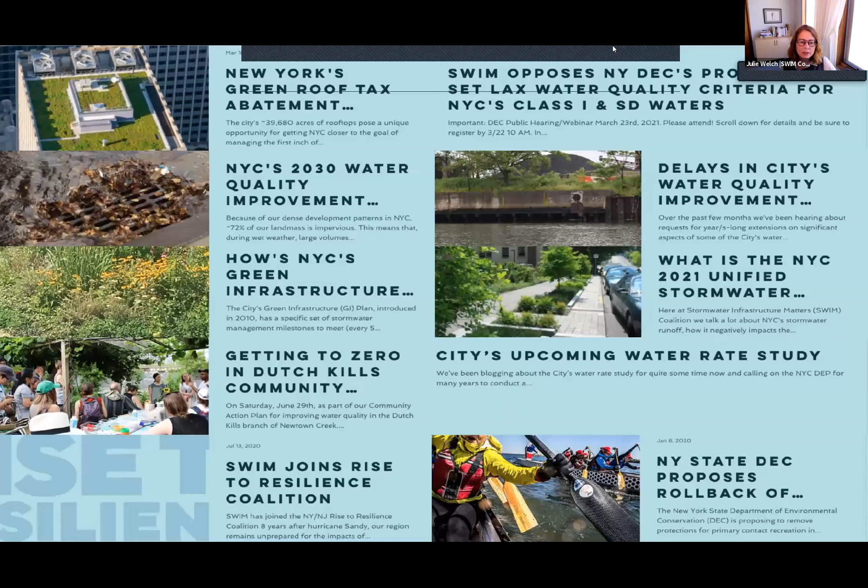Thank you also for hosting this meeting on your Zoom account. We do appreciate it. I also just want to take a minute and recognize all of the SWIM Coalition member organizations who over the past year have just truly astounded me with all of the work that you've been doing, the quick ways that you adapted to really challenging circumstances in our midst, and the work that you continue to do. It is an honor to be part of this organization and to interact with all of you. So thank you to the SWIM Coalition members whose work is truly amazing and does enormous good for the entire city of New York.

As Shino mentioned, we do want to have everyone please put your name, organization and pronouns in the chat box. We are recording this session and we'll post it on a YouTube channel to share it with folks who aren't able to attend today. And there is one person who I really must thank for an enormous amount of work over the past couple of years, and that's Anna Yee, a recent graduate student from the Pratt Institute, whose work has been sustaining us now for almost two years. She was a Pratt Fellow with us and then has stayed on to work with us throughout 2020 and then this year too. So thank you, Anna, for all of your work.

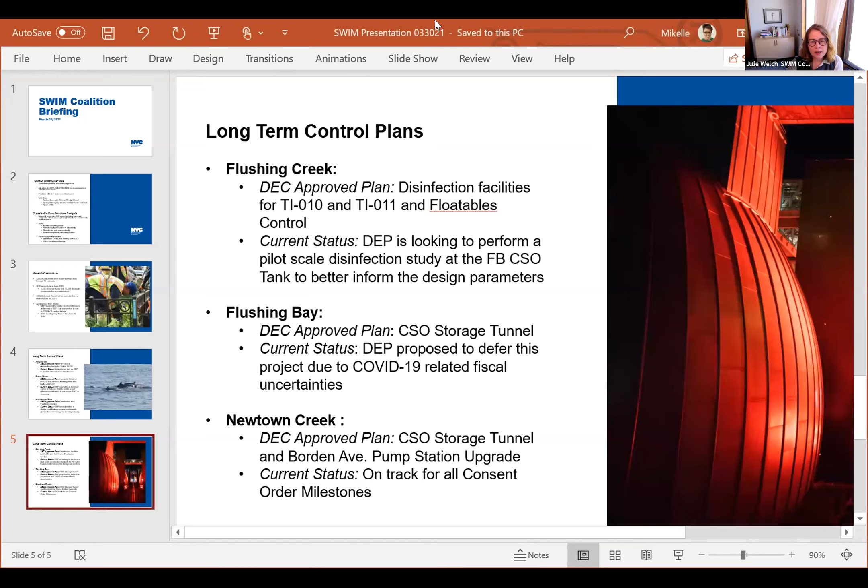Okay, I'm sorry, Julie. Did you want me to skip to LTCPs, or if you could, I think that would be a good place to start.

Sure, thank you. So good afternoon, everyone. My name is Mikelle Adgate, calling in from New York City DEP. I think I know most, if not all of you, so it's definitely a pleasure to be here after a very long year, as Shino mentioned.

In preparation for this, I know many of you were part of our LTCP public participation program that kicked off back in 2012. Between 2012 and just last fall, 2020, we submitted 11 long-term control plans to the state. Of those 11, 9 were approved by the state, and 2 are still under review.

I want to give an update on the ones that had active projects associated with them. Going in alphabetical order, for Alley Creek, the approved plan from DEC was a disinfection facility at one of the CSO outfalls. In discussion with the state and with many stakeholders, some of whom are on the call and some based in the Alley Creek area, we have been talking to the state about a design alternative that is not disinfection.

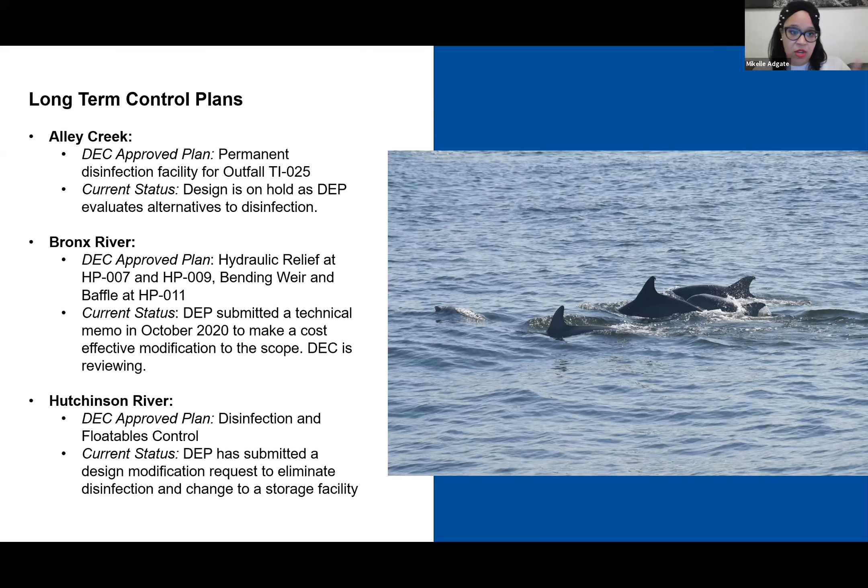But if you're interested in understanding what we've discussed with the state so far, our letters for Bronx River and Hutchinson River are available on the DEP website, as is the technical memo we prepared for Bronx River. So if you're interested in understanding where we are before those public meetings kick off, you're welcome to do that.

Going on to Flushing Creek, the DEC approved plan was a disinfection facility for TI 10 and TI 11, as well as floatables control. In terms of current status, we're looking to do a pilot scale disinfection study at the Flushing Bay CSO tank to better inform design parameters. Some of you might remember we did a disinfection pilot for Spring Creek that ended around 2017, 2018. This would be a different scale pilot so we can look specifically at the Flushing Creek drainage area and get better information before going fully into design.

If you were involved with the Swim Coalition at that time, we did multiple presentations about that Spring Creek pilot, including meetings after it was done. We would do the same thing here, so folks are informed as we're making progress.

Flushing Bay, the DEC approved plan was the CSO storage tunnel. Last fall, we sent a letter to the state proposing to defer this project due to fiscal uncertainties related to the pandemic. As I'm sure many of you are aware, the city in general and DEP in particular has a lot of uncertain realities in terms of our finances for the future. So we, like many other agencies, are thinking through our planning, and we have proposed to defer this project. The state has that request at this time.

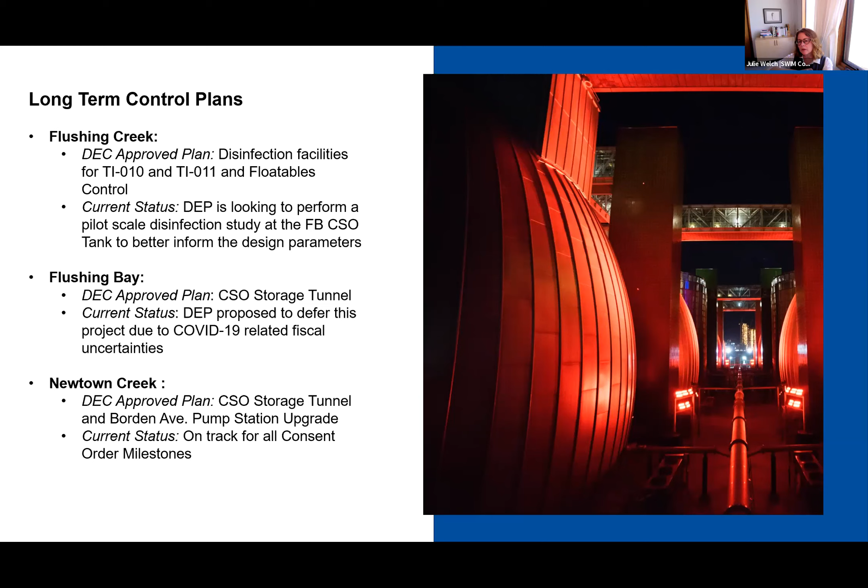And then in regards to pandemic related budget constraints, are there any impacts on the green infrastructure program that runs alongside these long-term control plans in a way? Yeah, let me go through GI.

I want to make sure folks are clear that GI continued through 2020. We were able to have it included in the contracts that continued throughout the pandemic, and thankfully we were able to keep our contractors and staff safe throughout that time. There was a lot of concern, but in terms of the overall GI program, that is still moving forward. We are not anticipating any cuts to that program as it relates to the budget, but we did experience some delays. Even though we were able to construct 3,000 assets throughout 2020 and we were managing 19 contracts throughout that time, we had anticipated certifying our 2015 milestone at the end of 2020.

We were unable to do that because of COVID-19 related delays, mainly due to contracting and cash flow. For those who remember April, May 2020 across the city, there were a lot of challenges getting money out the door and getting contracts registered, because there was such a huge emphasis on other contracting needs, right? The city was in production on masks and ventilators. So there were delays for other infrastructure related projects. Because of that, we were not able to certify the 2015 milestone. That's the most significant COVID related delay for the GI program.

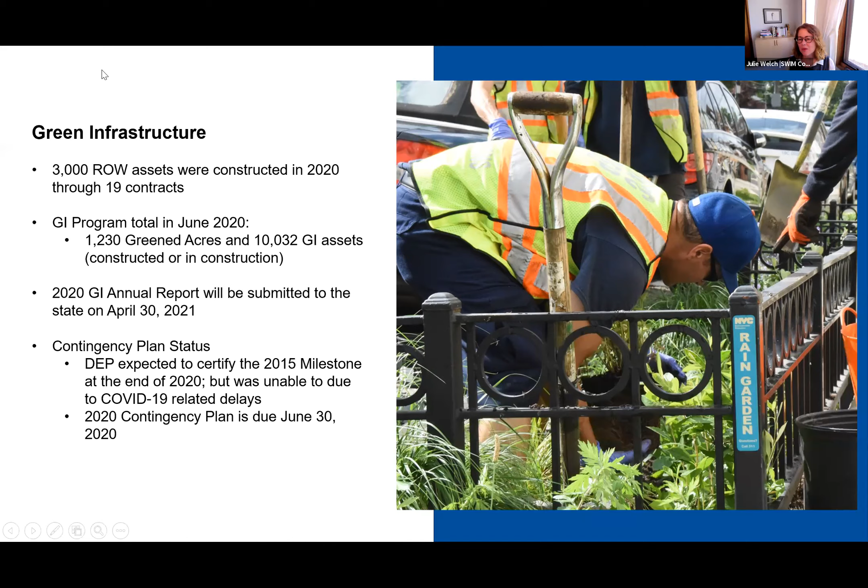This is a good reminder that nearly half of all the targeted land we have to manage to meet our 2030 goals for managing stormwater above ground is private property. So this will really help us move closer to the 2030 goals of managing the first inch of stormwater runoff in 10% of the impervious area of the combined sewer portion. Yeah, that was the initial goal of the green infrastructure plan.

I think as the program has matured, we're seeing a shift towards thinking about it volumetrically so that we can think about CSO control. And there's a lot more information about that in the GI annual report to help better clarify what we mean by green acres and that work.

Great. Well, let's talk about the Unified Stormwater Rule so we can finish up and give Willis a solid amount of time for he and Holly to present the Dutch Kills Loop project. The Unified Stormwater Rule is going to apply citywide. That's a very exciting aspect of this forthcoming rule. We've had these parallel programs running for the MS4 part of the city and the combined sewer part of the city. Now this rule is going to apply citywide, so very positive advancement towards more holistic thinking.

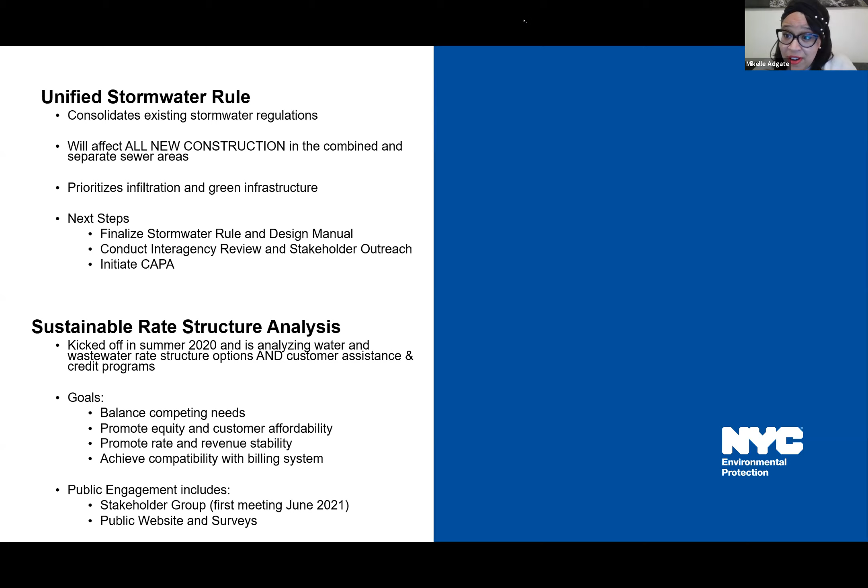I want to let you all know about some new resources on our website that will be particularly helpful for formal or non-formal educators. We've done a series of story maps that are really beautiful and amazing. It's basically a full virtual tour of the work that we do. We have one for the watershed, one for the wastewater system, one for green infrastructure, with videos and additional resources throughout.

Our education team has been putting together resources for teachers and educators as a way to really engage with folks who might have come upstate on tours with us or gone to our wastewater treatment plants and haven't been able to. Please check those out on our website. They're really stunningly beautiful in terms of the photos and videos our team put together, so highly recommend if you have the time and want to share.

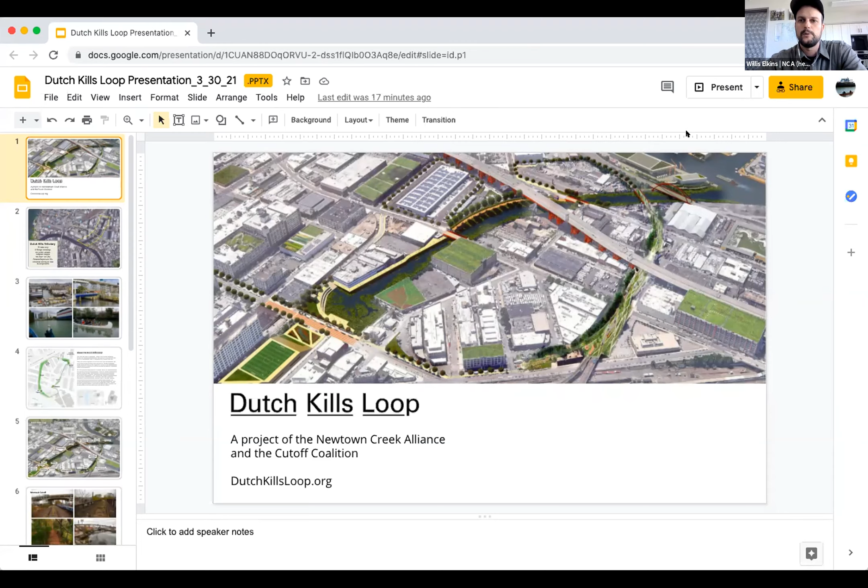Cool, hey everybody, thanks for having me. Thanks, Mikkel, for the presentation. I didn't want to feel like your time was being cut short to get to this, because there's a lot of important stuff you went over. So I'm going to share my screen and we're going to go through this. I'm going to do most of the presentation. Holly has been involved with this project through LaGuardia and other staff there as well. Feel free to chime in at any point, Holly, if there's anything I'm missing, but I'm going to speak for both of our views on this. So let's see here.

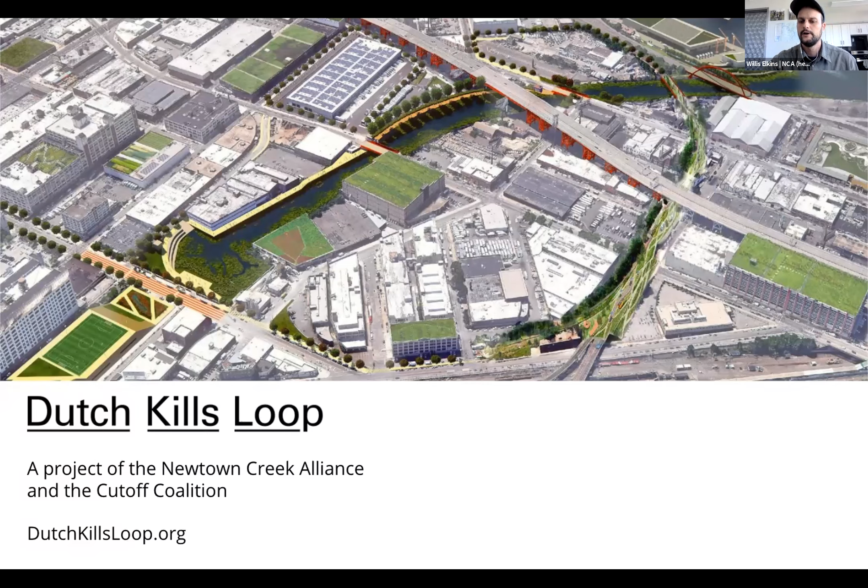Just as background, I know a number of people on this call are familiar with the creek and probably the Dutch Kills tributary as well. It's one of 5 tributaries on Newtown Creek. These are just some basic stats I wanted to go through - it's about half a mile long, so it is a substantial, interesting waterway.

There are 5 different bridges, and the reason that's important is because one bridge, the one at the very mouth, is an active rail line. The second one is the decommissioned Montauk Cutoff. But this first one is a bridge that's about 120 years old, and it's essentially rusted shut, with an air draft of only a few feet at high tide. So it's pretty much impossible to get any sizable boat back there.

This used to be a very active tributary for shipping, for barges to come in and out, but that hasn't been the case for a few decades now. That factors into some of our considerations for this waterway.

There's currently no true public access to Dutch Kills. The only real way you can get to the water is just by looking at it from some of the bridges that cross it. The waters are very stagnant, especially towards the head end, which is a big issue for water quality, dissolved oxygen levels.

CSO - there are a number of CSO outfalls, and currently there's about 160 million gallons a year of combined sewage that enters, and the majority of that is from the pipe at the very head of the inlet. So obviously water quality is not great after a rainstorm.

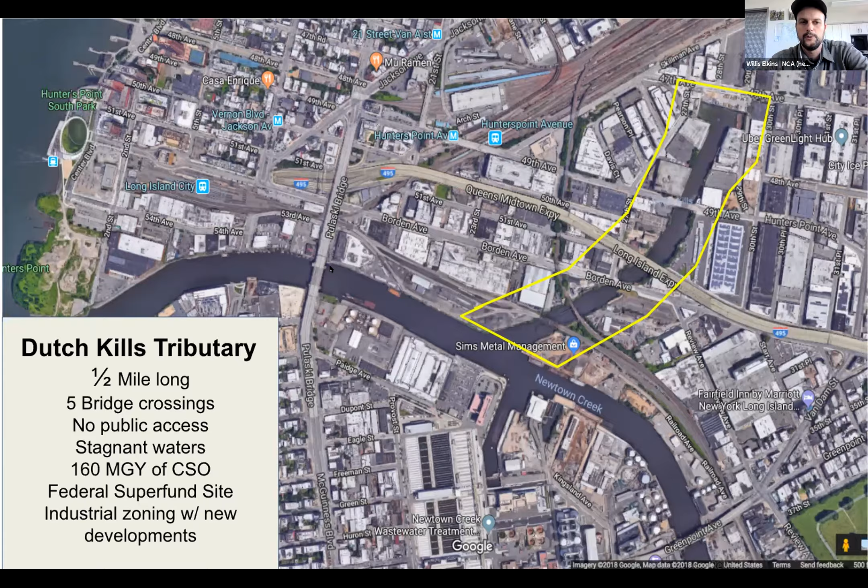Just some photos for background. This is the head of the tributary, a little turning basin that was once here when there was barge traffic. Photo taken from LaGuardia Community College. This is the Borden Avenue Bridge, the Long Island Expressway.

This is the North Brooklyn Boat Club from a few years ago on a bird watching trip. And this is some of our water quality sampling that we do regularly, which has also been really important. NCA and LaGuardia do water sampling in Dutch Kills tributary, which is valuable because DEP and Riverkeeper do water quality testing on the rest of Newtown Creek and have for like 20 years at this point. But in part because of the low bridge, this tributary kind of gets overlooked in terms of some of the data collection.

So about the Dutch Kills Loop, the idea is that it's a continuous walking path with some main components, about over a mile long. Some of these components are on the street, and the main section is the Montauk Cutoff, the decommissioned rail line, and then going up along the shoreline to 29th Street.

One of the big components here, as I've mentioned, is LaGuardia College, which is one of the anchor sites. They have a series of buildings just a block away from the tributary, and they're currently finally creating some real open space on campus, despite having thousands of students coming there every day. It's really surrounded by parking lots and very busy streets, so there's such limited open space for the school—essentially one spot in the middle of the building to access.

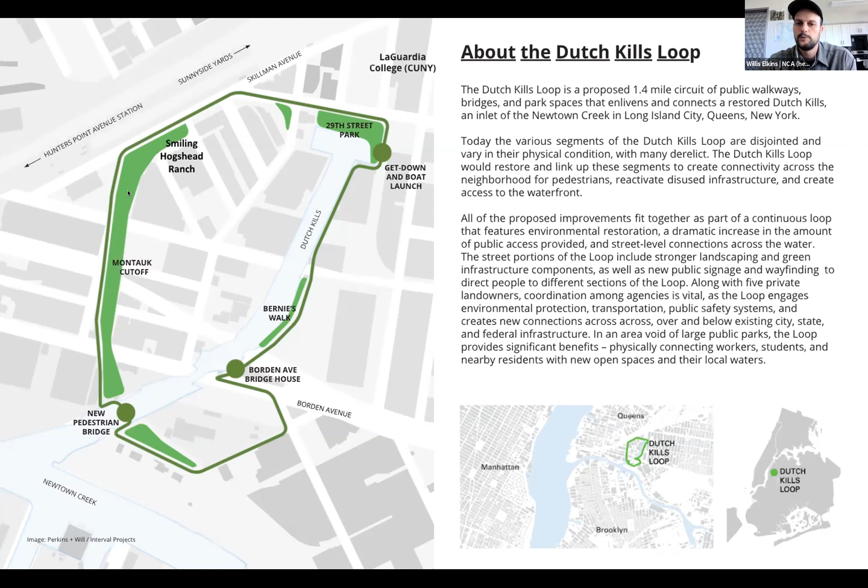Next slide. So this is the rendering from the Riverkeeper vision plan we did a few years ago, and I just want to throw this out as a caveat: the vision plan had everything from projects that are in the works, to projects that have been talked about for 20 years that would be really great, to projects that are very aspirational in scope and aren't necessarily tied to feasibility of costs or certain things like that.

So the Dutch Kills Loop project kind of encompasses a lot of this, and what we're doing now as a team is going back and reevaluating: okay, what are the most important priorities for this project? Which ones do we feel are most feasible, and how do we get there?

So you'll see here things like a new railway bridge—that would be really great to have, a new bridge that isn't rusted shut, but there's nothing really in the pipeline now in terms of funding to make that happen or the logistics. This idea of having a new pedestrian bridge where the decommissioned rail line is, is something we've talked about. Again, we have to figure out the logistics and feasibility of that.

So there's a lot of stuff in here. Wetland restoration has already begun, and we feel there's a lot of opportunity for that going forward. Green roofs, we'd love to see more of that as well. I'll just skip ahead, but this is the general overall view. And then this connection—we'd have to figure out a bit more how to cross the creek here, with the existing bridge, a new bridge, or maybe coming down along the shoreline.

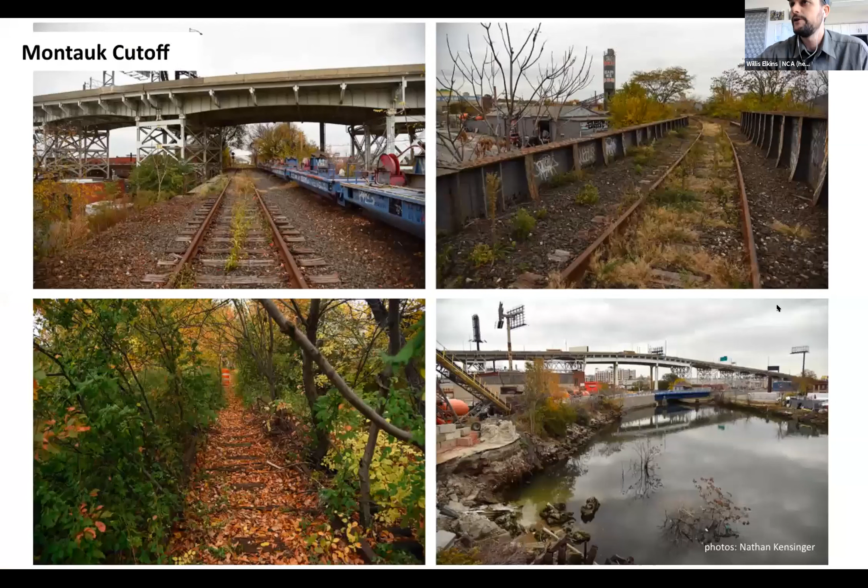So for the Montauk Cutoff, I wanted to highlight some of the key areas. As I mentioned, this is a decommissioned rail line owned by MTA, and they have no plans to start it up again. So we feel like it's a very obvious place to create public access and public space in this area of the creek. It goes over a number of streets and underneath the LIE. As you can see, parts of it are very overgrown, reminiscent of the High Line and also the Queensway project, although we try to keep our references to the High Line to a minimum because this is a very different scope in terms of the area. And then of course it comes to the creek here as well.

So these are all photos from Nathan Kensinger, who had a really good essay about it.

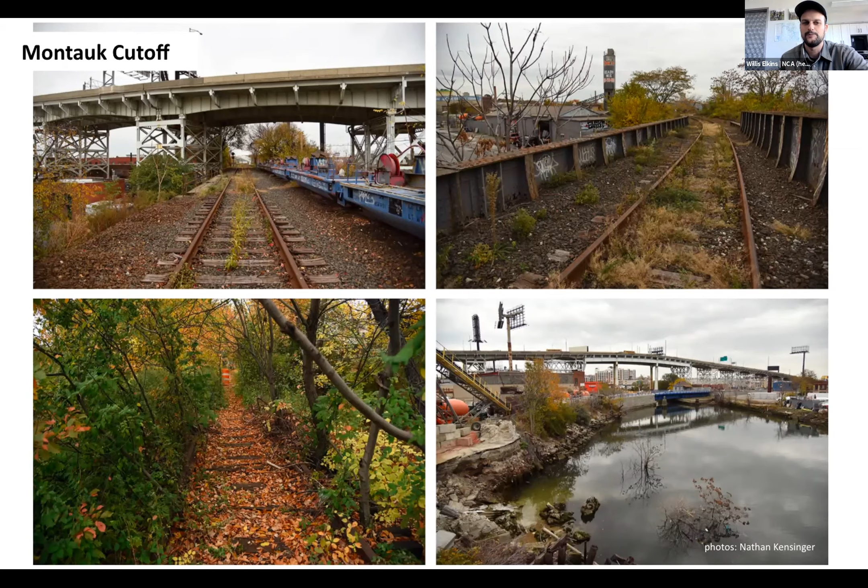Where we're at with this is basically that MTA has no interest in maintaining or owning this site, as far as we can tell. They put out this RFEI five years ago and want to move forward. So we need to find a way to get a proposal to them where we basically take it off their hands. There are significant questions about ownership, liabilities, access, and maintenance of some of these bridge structures. But it's certainly a very cool, interesting site. Technically it's private property, MTA property, so you shouldn't be going up there, but go check it out—look at it from the street.

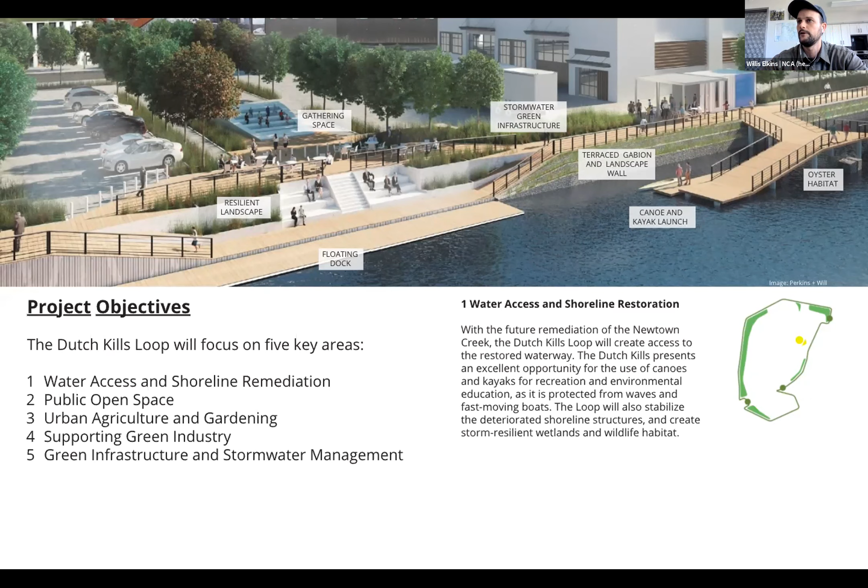And of course the shoreline restoration—like I said, we'd love to see the salt marsh expanded. I should have put some better photos of what the salt marsh looks like, because there are sections that have done really, really well in the past couple of years. That hopefully will roll out and develop as the Superfund progresses. There's an issue about navigability in Dutch Kills—it's still deemed a navigable waterway, even though in reality it is not, just because of the bridge, but also because the depth of the waterway is pretty shallow in a lot of areas as well.

So some opportunity there. Obviously public open space we talked about—these are renderings that were part of the proposal we put forward in 2016 for the Montauk Cutoff, thinking about how we can turn that rail line into open space. The urban ag and gardening, a lot of that came out of our work with Smiling Hogshead Ranch.

That community garden was established about 10 years ago, and was essentially some local gardeners who saw an empty piece of land and started gardening and farming on it, then learned it was MTA property and eventually entered into an MOU, a contract with MTA to remain there. It's a really amazing space, a great asset for the community. It's always open, there's no fencing, so people are free to come in and hang out amongst the garden and the trees.

We feel like that's a really important opportunity to expand up onto the railways. They've also grown their composting program there significantly in the past year. With COVID, the city shut down curbside collection, so this has been a site where they've really grown that operation as well. Those are both components we would like to see expanded up onto the rails.

Obviously, there's a lot of potential for working more closely with LaGuardia and their students. I know learning about urban agriculture has been a priority over there.

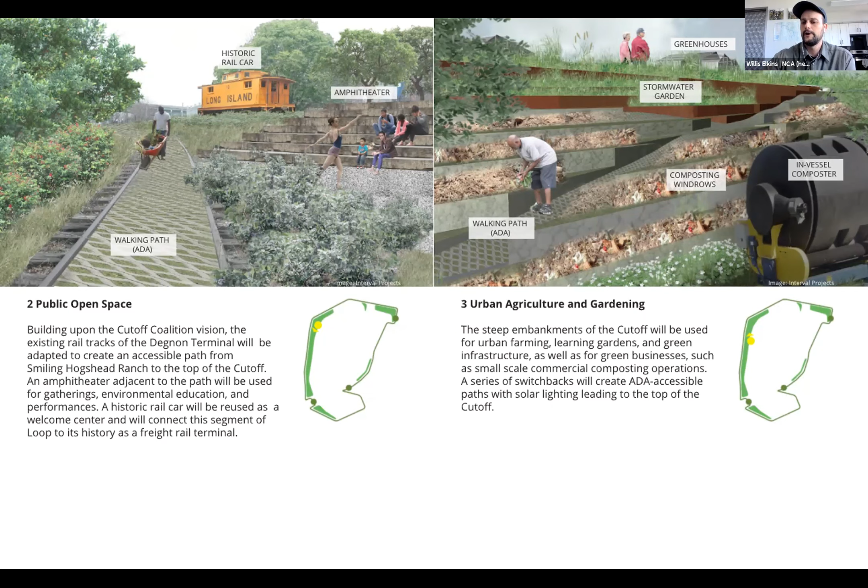Supporting the green industry—as I mentioned, this is an industrial area, and we've formed a lot of really good relationships with many of the businesses here. We also see this as, in general within NCA, our work trying to create these environmental improvements and benefits while also supporting the industries there and maintaining it as a working area. Again, a lot of opportunity for what that could look like in terms of green jobs, and we think the cutoff could be a great place to pilot some of that.

And then lastly, green infrastructure and stormwater management. This is a priority area surrounding Dutch Kills, and there's been a significant amount of curbside rain gardens that have gone in—some just a block or two from Dutch Kills, but mostly in Sunnyside and Long Island City, just to the east of Dutch Kills. It's been really great to see those go in.

Having the opportunities to expand that, as Mikkel mentioned earlier, is really exciting. There are some very large industrial green roofs in the sewer shed here, and we would love to find ways to utilize those and create more green infrastructure surrounding the area for all the numerous benefits of GI.

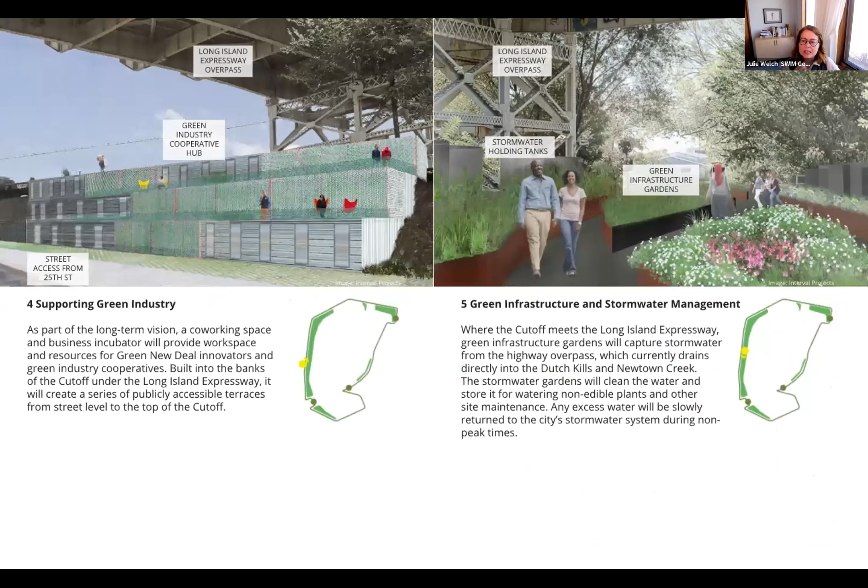I think this is what it's going to look like for stakeholders all around the city along our waterways, to get access to them along the coastline, and then ultimately get them cleaned up enough that we can get onto them and use them recreationally. So this is like a little prototype of what we will be doing around waterways throughout the city.

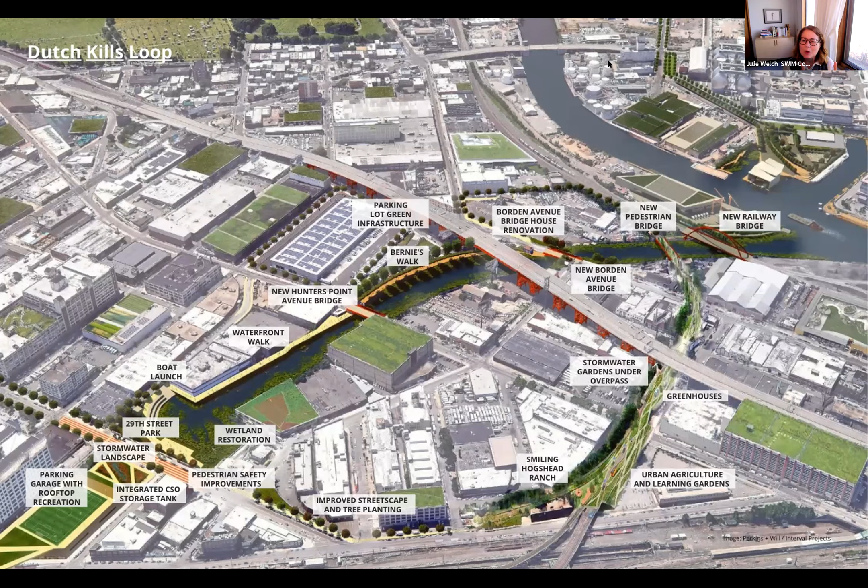There was an interesting op-ed, I think on City Limits this week, about street ends and making street ends access points to our waterways, which I thought was right in keeping with what Newtown Creek Alliance is doing in terms of always keeping your street ends cleaned up and ready for that to happen anytime.

We really appreciate you presenting this to us. I feel like it's a prototype and a model that we can apply throughout the city over the next, between now and 2030, when we have to meet our clean water goals and our stormwater management goals. And we've got 9 years to do it. Everybody get going.

Who's got questions for Willis and Holly? Anybody? One from Lewis — wayside signage, or signage to direct people, is that part of the plan?

It is, yeah, that's something we talked about last year, and we're hoping to do this year — install some signage around the area that lets people know about this project we're working on and ways to get involved. There's a QR code too, so it can take you to a website where you could learn more about that specific area. So we're hopeful to deploy some signage this year around the site.

I think you mentioned Nate Kensinger a minute ago — he and his group did a little recorded tour of Dutch Kills called Listening to Dutch Kills, that takes you on a walk around that tributary. That would be nice to put alongside your signage in some way, if we can still access that recorded tour. I know SWIM has a link on our website.